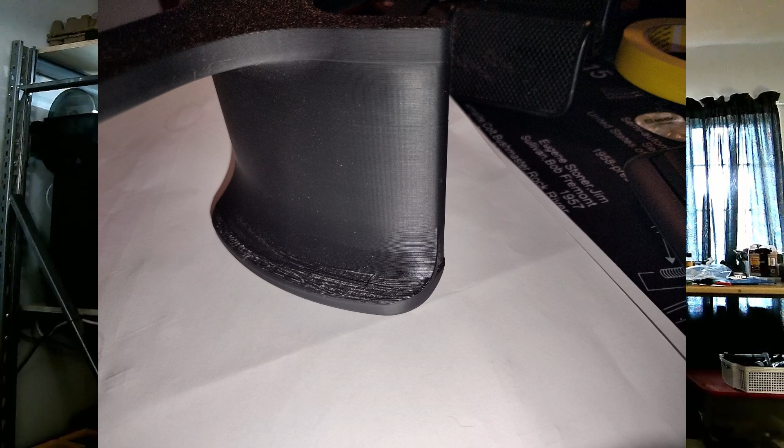I've watched a lot of videos, and I came up with a few things that I wanted to do, and one of them was just do something for my headphones at work, instead of them being thrown in a drawer. I printed this. It did all right, but as you can see here in the picture, you can see where the lines, it was just too much of a hang there, and it really tore it up. But the rest of the print came out pretty good.

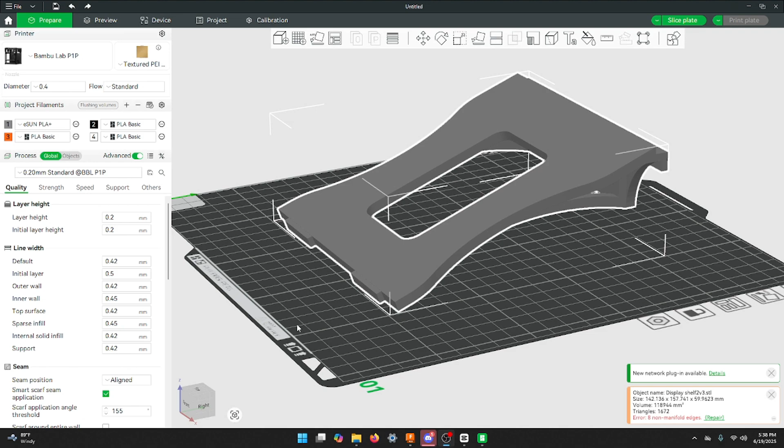And a couple of you guys have asked about details of the shelf and what I was working on trying to fix. So I put it up in the slicer right here, and I'll point out a couple of things for you. So I have about a half a dozen designs for these types of commercial shelving that go in slot boards and peg boards and any type of board that you can stick onto it. I can even do custom stuff.

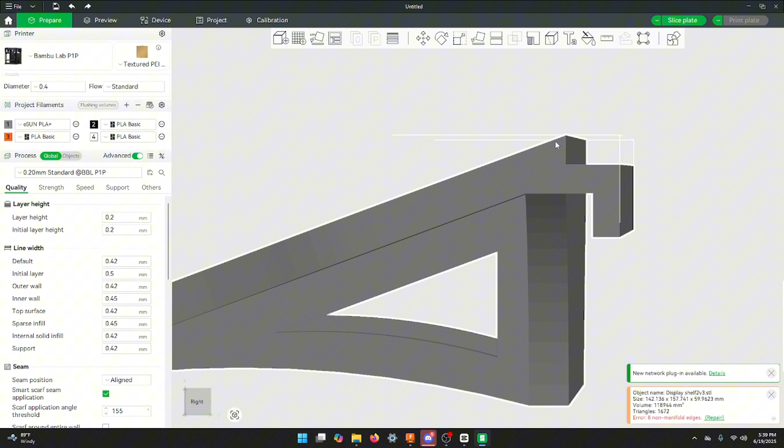But we had a problem with the top of this at the point. Originally, it was flat right across there, and none of that was there. But I had to get Brandon at work to go through SketchUp just to get it out of mesh in order to change it. But finally that's done.

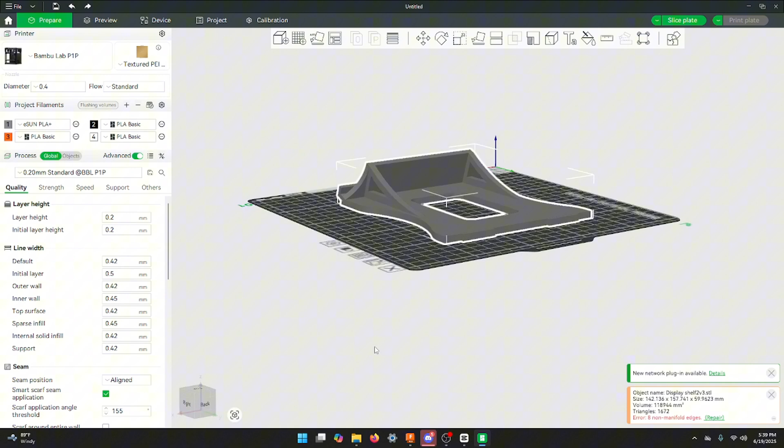It can be oriented correctly face down, and I really don't have any problem with support underneath there. I've actually printed it without it, and it's fine. But even if I did put supports right in that area, it wouldn't matter. It doesn't get seen. It's inside the slot itself.

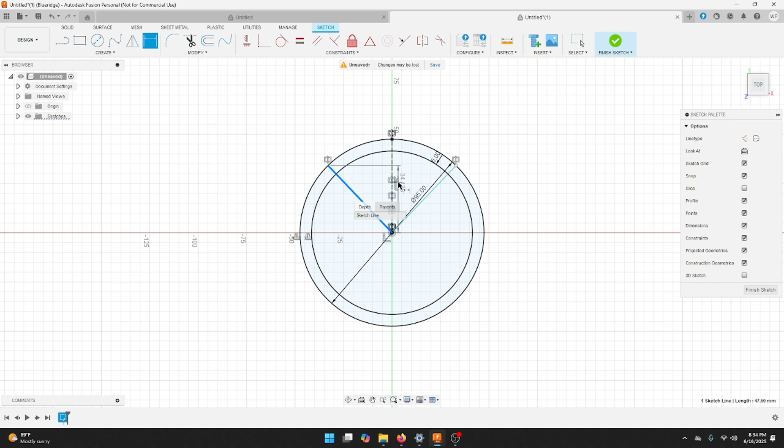So onto the headphone holder. Let me pop you into 360 there. So let's speed this up a little bit. I find the hardest thing about Fusion is just getting the sketch done.

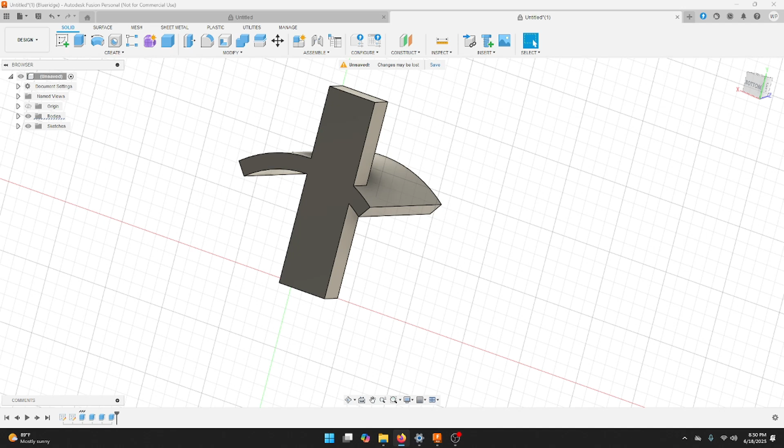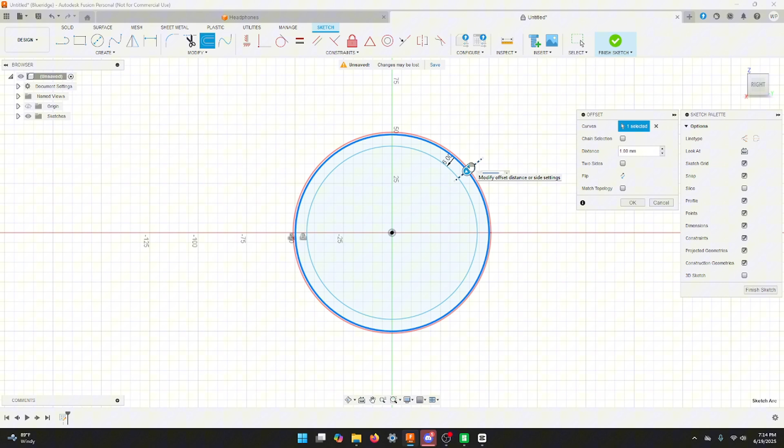Alright, let's go ahead and move into making a new one. You can see all my mistakes from the last one. I'm going to start off with a circle at 100 millimeters, and then I'm going to back in another circle, -6 millimeters. I'm going to add another circle on the outside for 1 millimeter, and then I'm going to set my lines. And what I'm doing is creating this V with an arch across the top, which is going to hold my headphones.

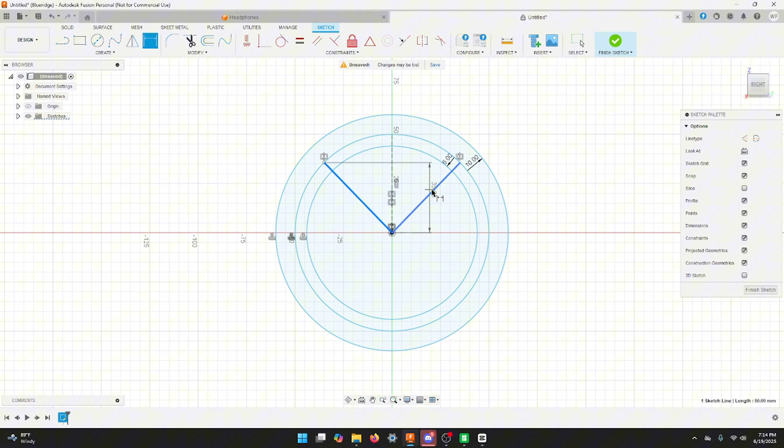Going to set that at about 75 degrees and get it to lock in.

You probably can hear the printers in the background. I'm sorry about that.

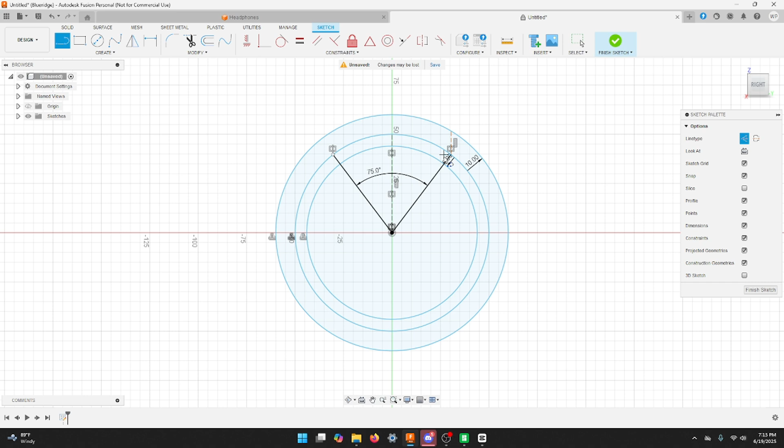75. There we go. That's about right. And now we need to close in our design. We're going to set 2 tiny lines up here, which will close it all in. We're not using about 75% of this. We're only using 25%. There's our lines.

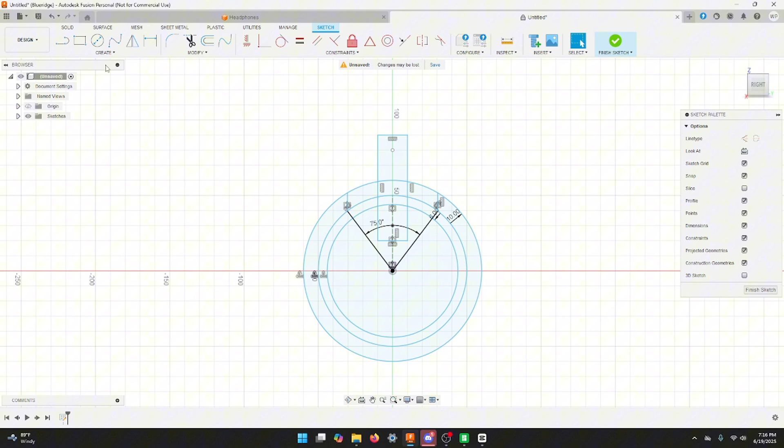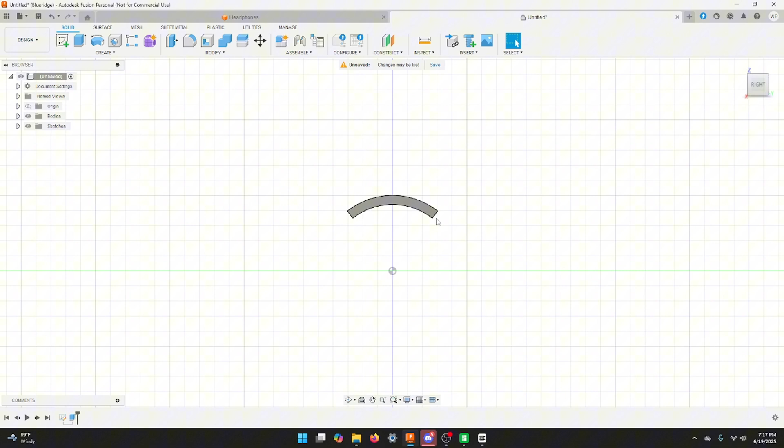Go ahead and set our back. This is what's going to hold the screws and hold everything to the desk or wall. Set a couple of reference points for my screw holes. And really, I think I'm ready to extrude from here. So we have to set for our main ledge, which is these 3 pieces. There we go. We'll extrude that to 40 millimeters. So let's take a look. There you go. Add our sketch back in so we can draw around it.

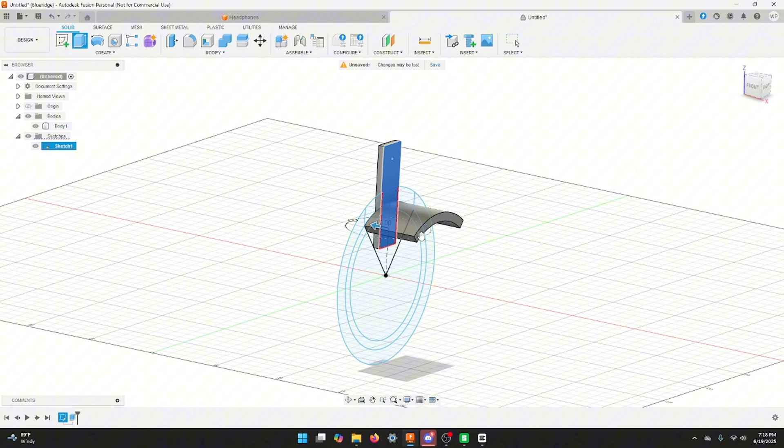Now we'll work on our back. And we'll pull this out -5 millimeters. Go back the other way. There we go. Looks good. Bring this out.

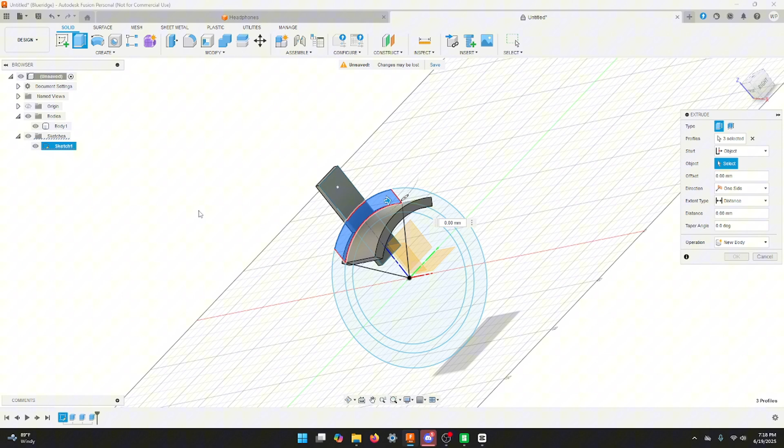Now we need to create the front lip, which will hold everything on. So we use this outline here, and we're going to pull 5 millimeters from this section here. -5, it pulls it up. Not 55. There we go. And there's our basic design. That's what we're looking for right there.

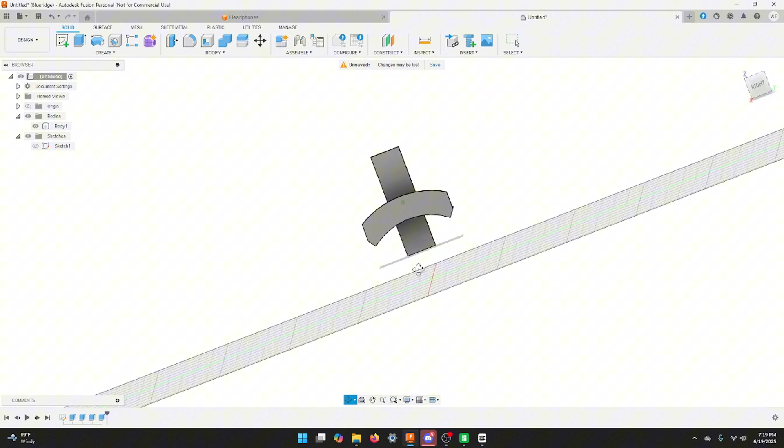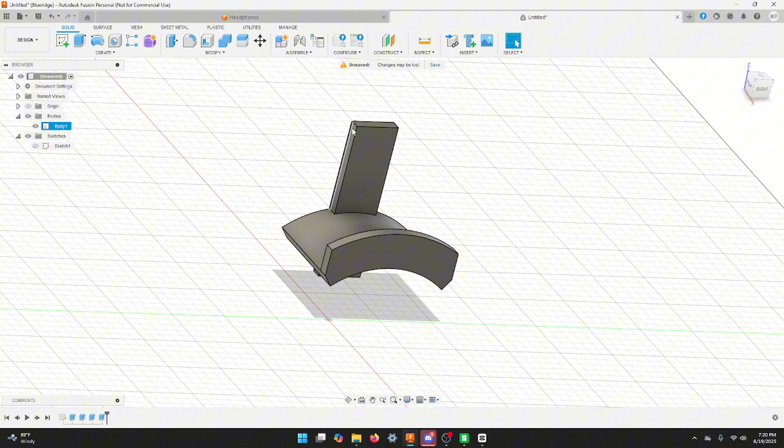Alright, so now we just got to sit around and use the fillet tool, and we'll round over these edges and see if we can't get it to print better. Rounding these over, probably the most fulfilling part of it. Seeing how it's gonna start shaping up.

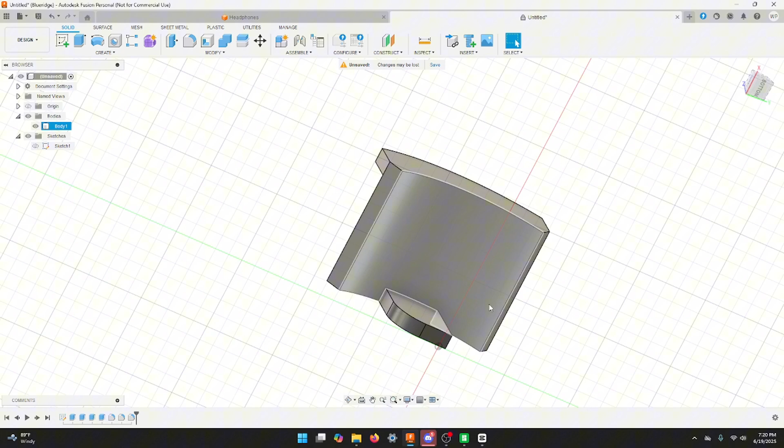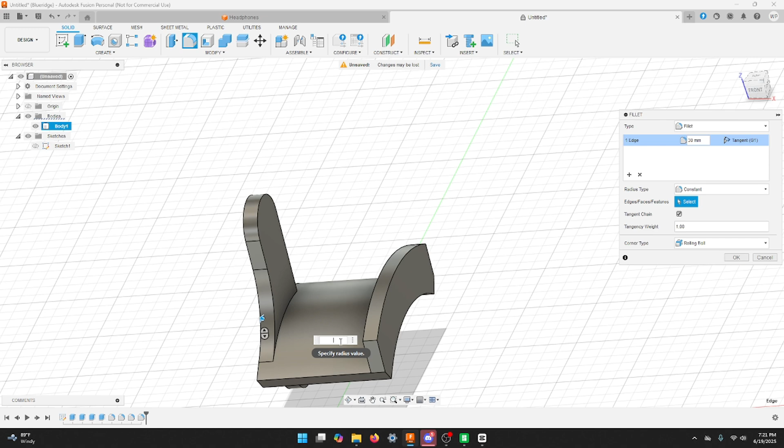Hardest part for me is staying oriented. I am starting to learn the keys a little better. Still not enough. I don't know, that's not bad. Let's match the other side. Yeah, give it nice and beefy. That'll hold it on there.

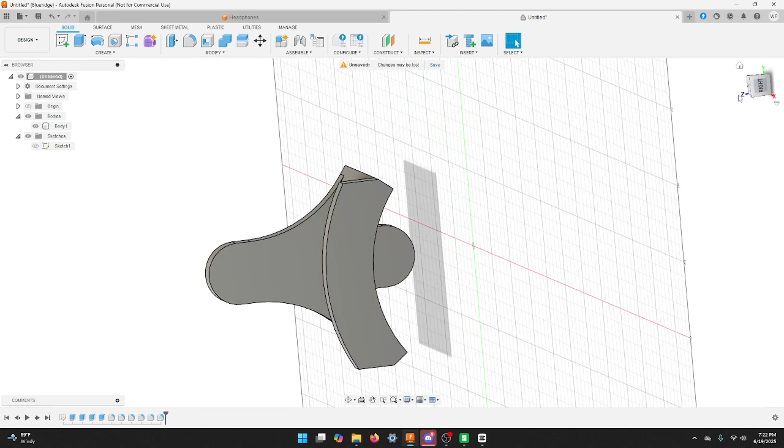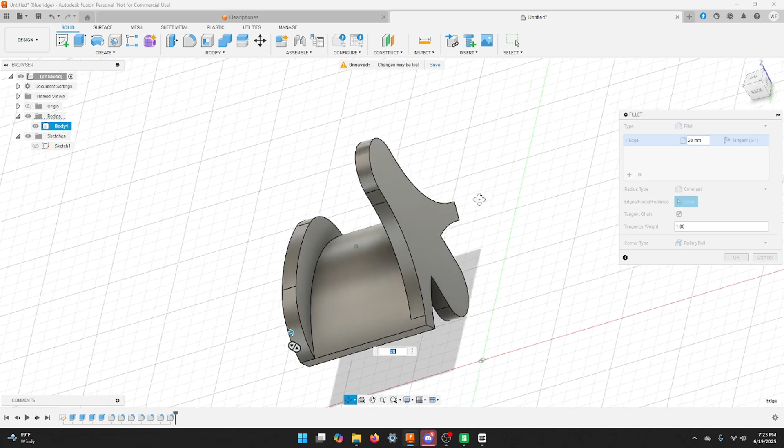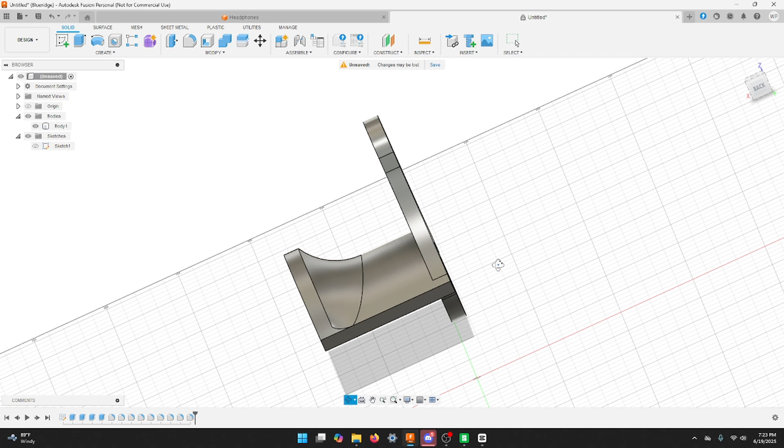We're going to round all this stuff over right quick, and we're going to set that one troubled area at about 20 millimeters right here. Yeah, I don't know, that's still going to be a little close. I don't know, it's better than the last one though. I think the last one I did 10, so we doubled it this time.

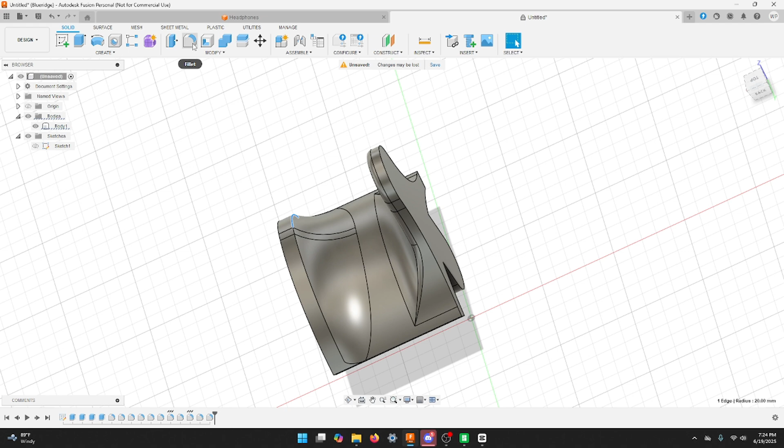So I'm going to finish doing the fillets here. I'm going to drop in a couple of holes, and then I'm going to send it to the printer, which you probably already hear in the background.

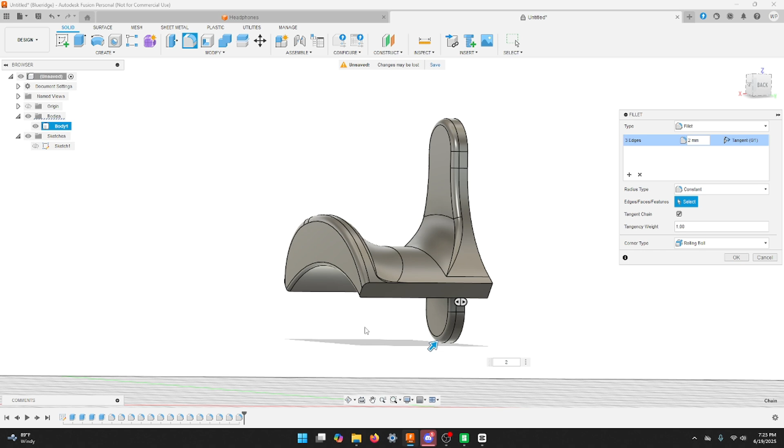Well, there you go, YouTube. Even an old dog can learn new tricks. I picked this all up in about a week, and I'm going to keep pushing myself for the next few weeks and try to get even better than I am today. As soon as the part comes off the printer, I'll show you that at the end of the video.